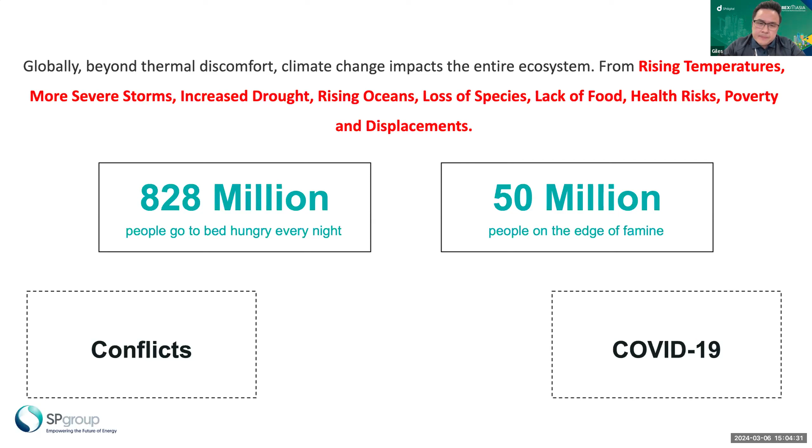Number one is conflicts—we have seen it in Yemen, in the Russia and Ukraine war, and more recently in Israel. Number two is COVID-19; I think the majority of countries around the world are still reeling from the economic effects of this pandemic. And lastly, climate change—this is why all of us are here today. Even though you and I are unable to resolve global conflicts or reduce the effects of the pandemic, I think SP Group, as a utilities company, is in a good position to have an impact on climate change.

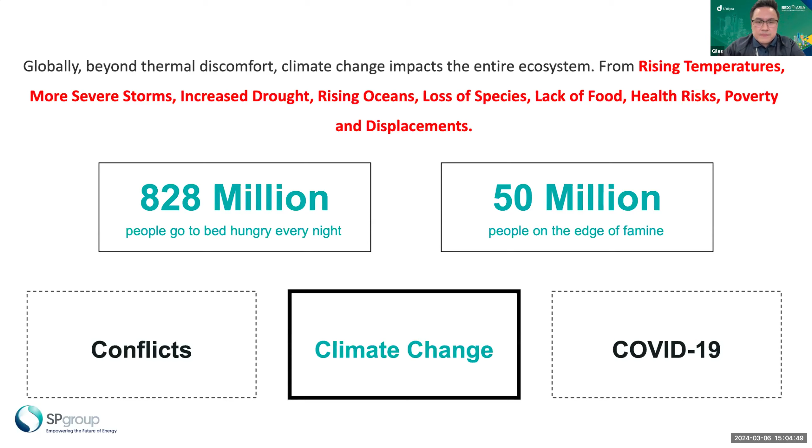According to Singapore's National Climate Change Secretariat, there will be other significant impacts to Singapore other than experiencing hot and uncomfortable temperatures. So the first impact, rising sea levels. This is of immediate threat to Singapore, based on the fact that we are a low-lying island.

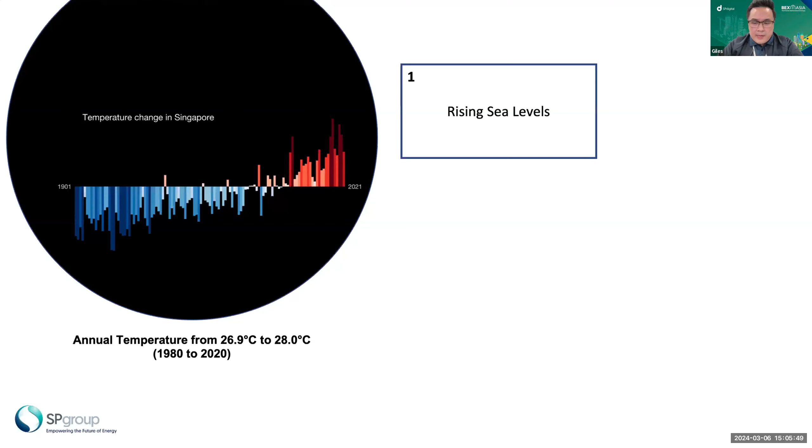The second is water resources. Because of extreme weather patterns, it will lead to periods of drought, sudden episodes of intense rains, and at the end, it will affect the reliability of Singapore's water supply, which is our most precious resource.

Biodiversity and greenery. An increase of 1 to 2 degrees in temperature could actually put Singapore's greenery and wildlife at risk. And this will actually alter the natural ecosystem.

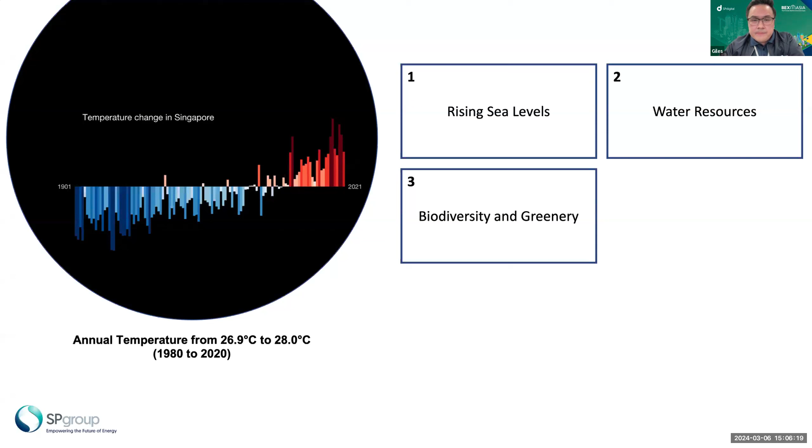The fourth effect, public health. Diseases such as dengue fever usually happen during the warmer period of the year. So we have frequent, severe instances of warm weather that may lead to heat stress and discomfort among our elderly and the sick.

The fifth impact, urban heat island effect. Urban areas are generally warmer due to the replacement of natural land cover with buildings or infrastructure that retain or produce heat. This can also lead to heat stress and an increased dependency on using air conditioning, which will in turn increase Singapore's energy demands.

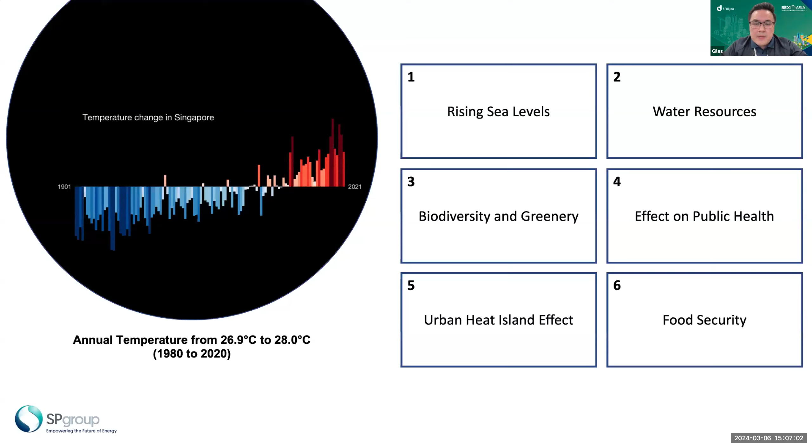And lastly, food security. A small increase in temperature can also disrupt crop growth around the region, and this will eventually impact our entire food supply chain.

I hope most of you are familiar with SP Group, and not just because we pay our monthly residential utility bills to them. We have recently updated our tagline from 'powering the nation' to 'empowering the future of energy.' This embodies our purpose and ambition to create a climate resilient and low carbon future.

I'll dive into each of these pillars, starting with district cooling. District cooling is an essential solution for Singapore to achieve our sustainability goals. Most buildings in Singapore operate their own chiller plants, as most of you know, but it just does not have the economies to run efficiently.

District cooling, on the other hand, is an efficient way of providing cooling through the aggregation of multiple cooling plants, resulting in freeing up precious space for other purposes. SP Group, we own and operate the world's largest underground district cooling network, located in the Marina Bay area. Today, we are providing chilled water to more than 25 of our customers.

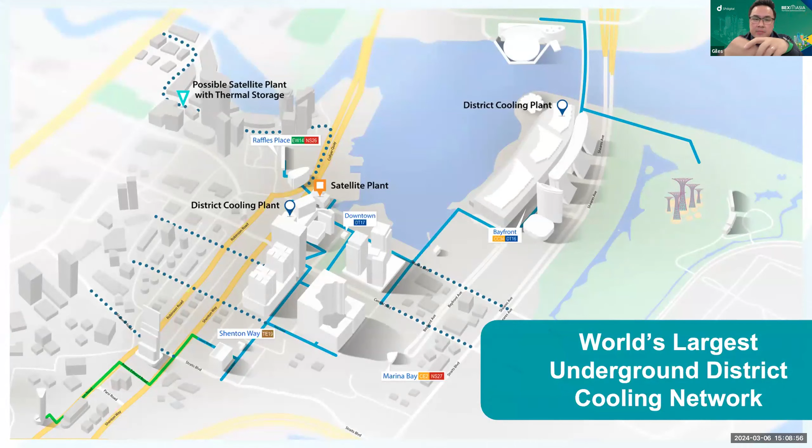To give you a sense of how extensive the network is, we have more than 5 kilometers of network pipes laid underground, which serves the Marina Bay and CBD areas. This network actually spans from the floating platform all the way down to Anson Road.

As you all know, Singapore is a land-scarce country. Brownfield built environment makes up the majority of the urban landscape we have. Cooling energy actually accounts for up to 50% of a building's total energy consumption, and in some cases, even more than 50%. So through our engineering and operational excellence in Marina Bay, we decided to take on the challenge of introducing what we call distributed district cooling, or DDC, in a brownfield setup.

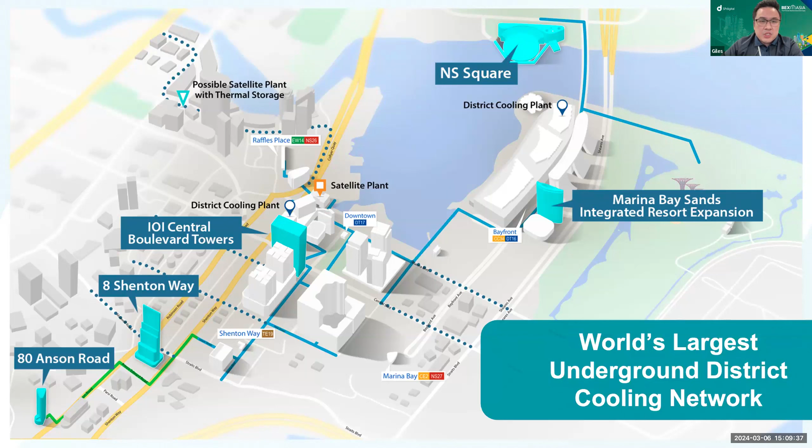For those of you who reside in Tampines, exciting times are coming our way as part of the Tampines Eco-Town initiative. In April 2022, SP Group, supported by Temasek, Tampines GRC, and the MSE, announced the Tampines DDC, where in the first phase, 7 existing buildings will be retrofitted to plug into a DDC network.

By interconnecting all these different buildings, we are able to leverage efficient chillers to provide chilled water to the entire network. And the most important point of this network is that it will also achieve annual energy savings of more than 2.8 million kilowatt hours, which can power more than 900 three-room HDB households for a year. So this is pretty significant.

Today, SP Group is the largest district cooling provider in Singapore. And other than the Marina Bay area, the Tampines Ecotown, and more recently Tengah, we are also working across other districts such as commercial, industrial, and the different business parks.

Through our district cooling projects, we are looking at approximately 158,500 tons of carbon abatement per year. This is equivalent to the annual carbon sequestered by approximately 8 million trees. For context, Singapore has slightly over 7 million trees. This is also equivalent to removing 145,000 cars off the road per year. Unfortunately, I don't think this will have any impact on our COE pricing. Lastly, and very significantly, it can also reduce 5% of Singapore households' total consumption per year. So the reason we are working so hard to proliferate district cooling is because of the significant carbon abatement opportunities it presents.

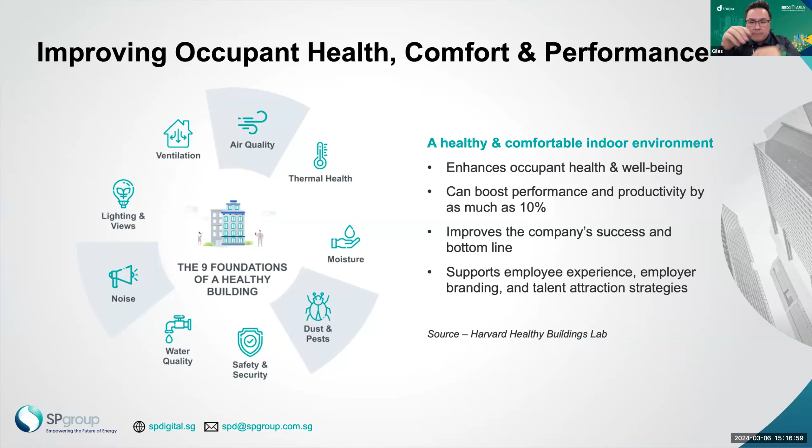So Get Control, we have a module called Dynamic Airside Cooling that will sense local parameters such as temperature, humidity, CO2, lux, IAQ, occupancy, etc., and transmit the data to our AI algorithm, which resides in the cloud.

This AI algorithm also takes into account IoT parameters such as the weather - whether it's sunny, rainy, or cloudy. It also takes into account the weather forecast, so whether in a couple of hours it's still going to be sunny or rainy, or there'll be a drastic change in weather.

It also considers the XYZ geographical coordinates of your property. Why do we need to know your property? You might be thinking - it's actually to determine which side of your building the sun is shining on.

So with all this data at our fingertips, the algorithm will then churn out instructions to operate the air conditioner at the most optimized level. Our Get Control solution will improve airflow and thermal comfort, and you will also see an increase in energy efficiency as the equipment optimizes according to these different demands and scenarios.

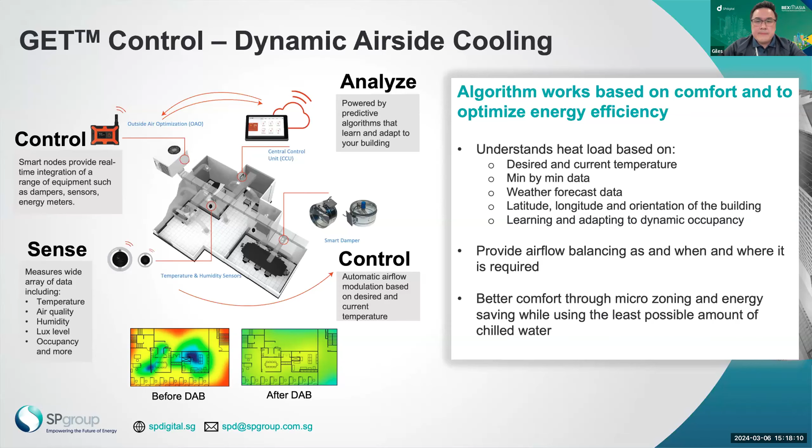I want to share a use case with the audience today. This is a Grade A commercial building located in the heart of the CBD. They have been getting very frequent feedback of hot and cold spots in their office due to external weather and constant aircon settings. Whenever their team has to rectify these issues, they have to perform manual adjustments to address these sudden changes.

Through the implementation of Get Control, this organization aimed to drive employee experience, resolve their thermal discomfort issues, and at the same time advance the sustainability goals of the organization. So we implemented Get Control at this particular property, and we worked with the HR team.

We did some surveys, and we have seen a 20% improvement in occupant comfort. Furthermore, they achieved 18% cooling energy savings.

Of course, hearing from me is one thing, but to hear directly from one of our customers themselves on this particular solution is another. So hear what CDL has to say on our Get Control solution.

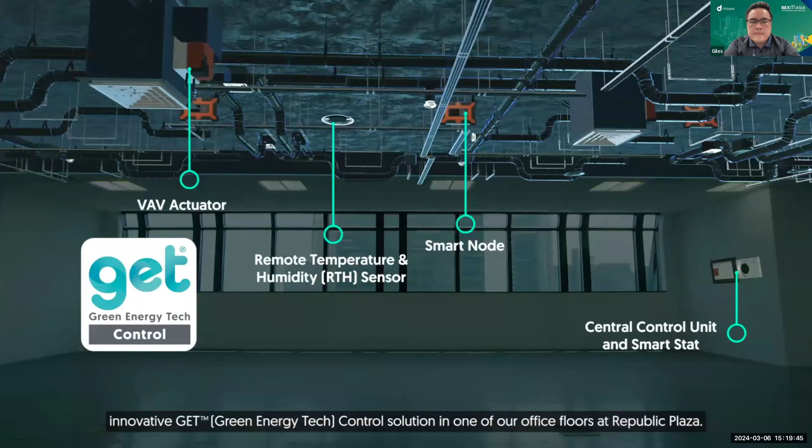CDL is committed to exploring smart and sustainable solutions to support our decarbonization efforts. In line with our efforts to connect building sustainability performance with the incorporation of smart technology, we are delighted to collaborate with SP Digital on a pilot project to implement the innovative Get Control solution in one of our office floors at Republic Plaza.

SP Digital was tasked to deliver in three key areas: optimize energy usage, enhance occupant comfort, drive sustainability. We activated Get Control, the intelligent IEQ control system, for enhanced occupant comfort, optimized energy usage, and operational efficiency.

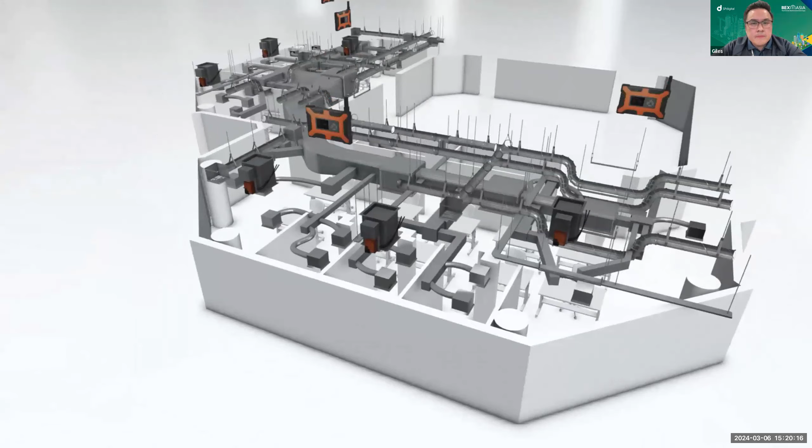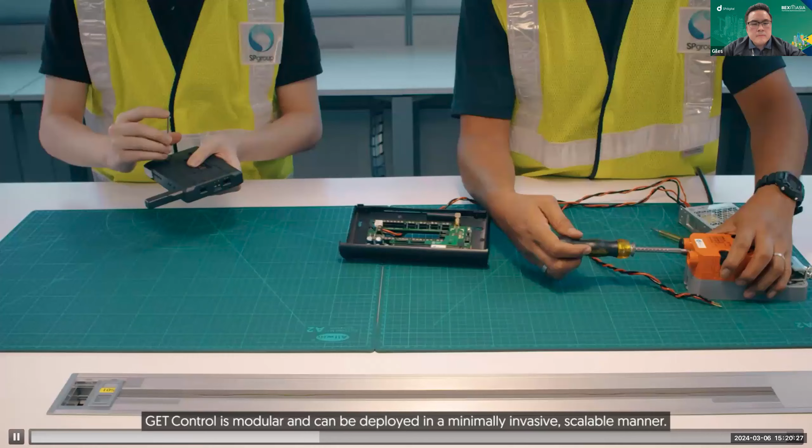Installation was smooth and hassle-free, incorporating smart, compact units. Get Control is modular and can be deployed in a minimally invasive, scalable manner. The large office space is divided into micro-zones with smart devices, with individual airflow control on each air conditioning diffuser.

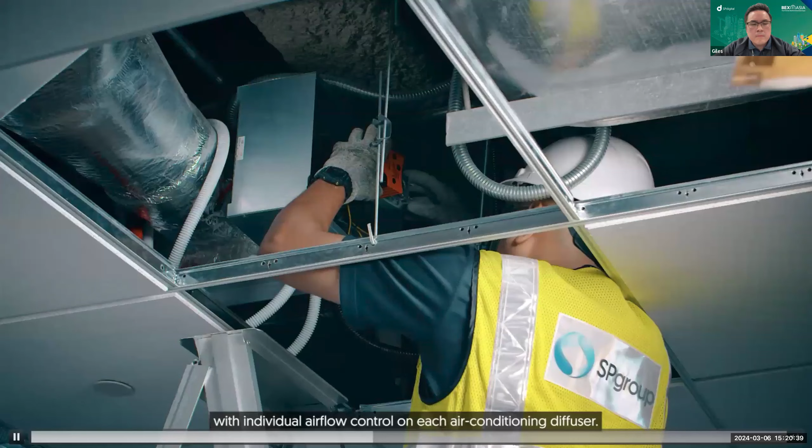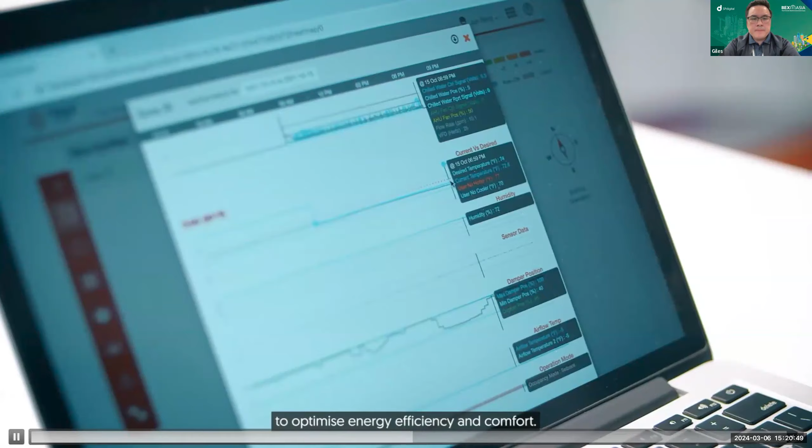Smart sensors continuously monitor the temperature and humidity to optimize energy efficiency and comfort. Airflow speed can be easily adjusted along with temperature set points. Get Control uses AI and IoT to dynamically regulate the air conditioning based on changes in occupancy and weather conditions. The result is evenly cooled spaces and enhanced occupant comfort with greater energy efficiency.

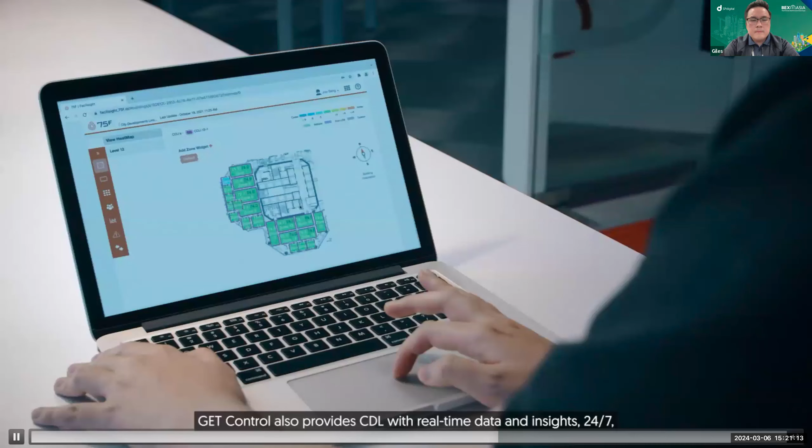Get Control also provides CDL with real-time data and insights 24/7, enabling proactive monitoring and remote control capabilities. The Get Control solution improves our existing air conditioning and ventilation system via its dynamic chill water balancing and outside air optimization features, together with our EC Plus fans installed at the AHU, resulting in 23% total energy savings.

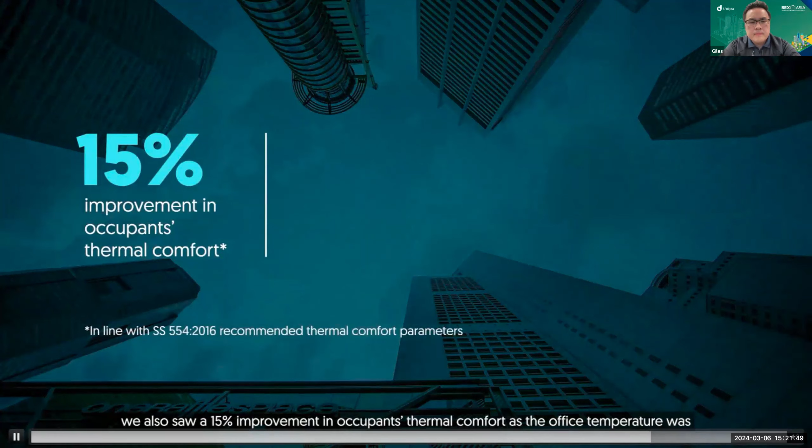With predictive analytics to optimize comfort for building users and building efficiency, we also saw a 15% improvement in occupants' thermal comfort as the office temperature was kept between 23 to 25 degrees Celsius.

We look forward to building partnerships with like-minded providers like SP Digital to achieve our decarbonization targets through innovative green energy tech solutions. SP Digital, delivering innovative green energy tech solutions that empower the future of energy for everyone.

Yep, so I hope this has provided you a better understanding of how Get Control can impact your operational efficiency, energy efficiency, and occupants' well-being in a positive manner.

And now on to the next module, which is Get Insights. As the saying goes, you cannot manage what you can't measure.

So Get Insights enables analytics and measurement of your utilities consumption. Traditionally, data are spread across various siloed systems in your property, and in most cases, even the meters are manually read. So what Get Insights does is bring the data of all these different systems together, coupled with automating the meter reading process as well.

This provides users with a holistic view of their property's utilities consumption, enabling them to see the current state's baseline and create performance indicators. Furthermore, Get Insights will be able to support regulatory reporting, such as ESG reporting and carbon reporting, which will be vital in the coming years.